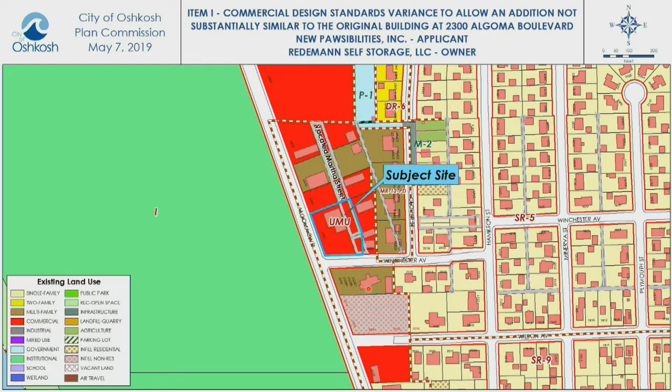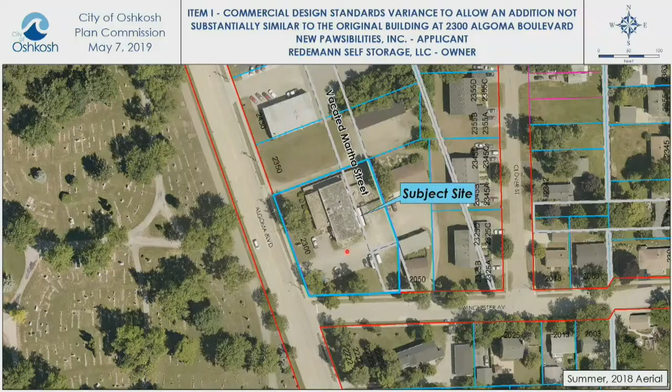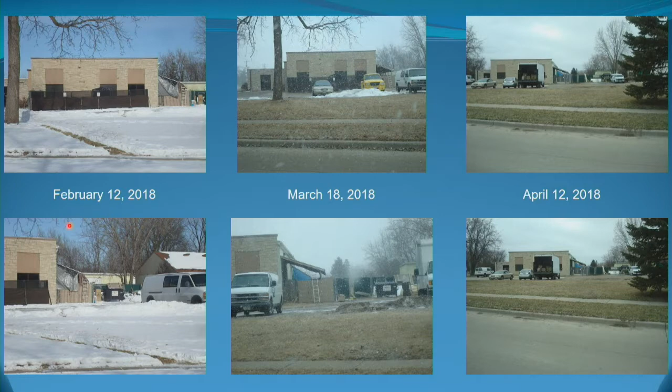Here are some images of the building in question. Planning services staff sent a correction notice early last year for this addition back here, and there was a fence also part of that notice. But the addition in question, or this overhang structure, was put on and no permits were obtained. There was no permit on file in our records, so staff sent a correction notice.

There was a little bit of back and forth between staff and the applicant about this, and it took some time—a lot of time passed—and then finally they applied for a design standards variance for this overhead or awning structure here. So that's what we're looking at.

You can see it's reasonably far away from Winchester, which is the closest street—probably 130, 140 feet away. It is partially screened by this, I think, 6-foot high chain link fence with vinyl slats. So it does help screen it a little bit, but it is there and reasonably prominent.

The applicant stated that a primary purpose for this awning is because they are a dog daycare, to allow the dogs to go outside and have some shelter during winter months or inclement weather—rain, snow events. They can go outside for a little bit, and this helps shelter them. That is primarily why they wanted to put this on and why they're asking to maintain it.

The code reference, because we like to make sure that people are aware of why we're here. This reference basically that we have to account for in the standards is that all additions to an existing building essentially shall match or be substantially similar to the design and materials of the existing building.

The existing building is a brick building. I don't know if I had a really good image of it, but you can kind of get a sense of some of the brick cladding there. There's some glazing. I don't have unfortunately the best image from Algoma, but it's reasonably attractive. It's not a poor looking building for what it is. Former industrial, now commercial building on that site. I think it was built back in the 20s, according to the assessor webpage. So a little while back.

But then they added this on, and because we as staff felt that it was not materially similar, substantially similar in appearance, we wanted them to come for a design standards variance.

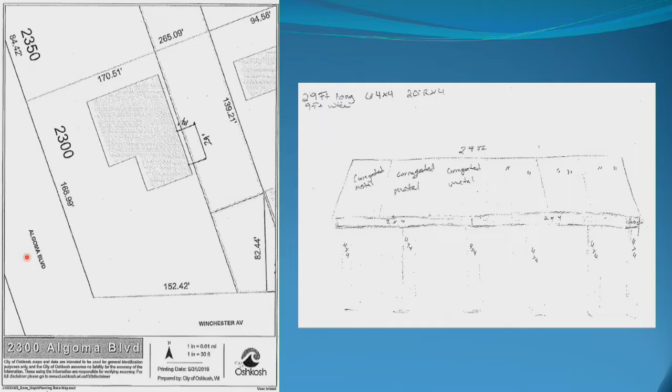So we talked about it as staff. We looked at it. We discussed it with the property owner, with the applicant. So we had some conversation with both of them. And we would recommend approval of the design standards variance to allow this overhang structure.

But we did have a number of conditions for this. We did talk to the Department of Public Works, and because that structure extends into the vacated right-of-way, they would need to have an encroachment agreement on file between the property owner and the city because that structure extends. So a condition of approval would be that this encroachment agreement shall be obtained by the property owner. I did check with the property owner because the applicant and the owner are different. The owner did confirm via email that he had no problem with obtaining that agreement and working with us.

The second condition is that within 6 months of variance approval, an appropriate landscaping plan shall be submitted to the Department of Community Development for our review. And what we're looking at for that is this area, trying to screen this fence a little bit with some kind of landscaping. They did say in their application that they were open to doing some kind of landscaping, so we wanted to see something there. The fence helps screen this structure, but we'd like to see some landscaping, something to break that up. And it's not the most attractive right now, so we did want something in terms of that submitted.

And then the third is that within 6 months of variance approval, acceptable labeled elevations or detail drawings showing a finished condition. Because right now, like I mentioned, the fascia is 2x4 wood, and it's not finished, it's not sheathed by anything, it's not covered. We want to see them either sheath it in some kind of water-resistant material, something, because we feel that otherwise you get issues with rain and water infiltration. That wood there may have issues with that. So we want some kind of finished condition submitted, something reasonably attractive. Our primary concern is maintenance of that long term.

And then also submitting building plans to the inspections division within 6 months, because inspections did ask for a little bit more detailed plans than what was submitted, just showing how this thing goes together and how it looks, in terms of details and how it stands.

And then the last condition would be that the petitioner or owner shall stain or paint the exterior wood supports. Again, we just want to see that finished, and then ensure that the structure as a whole is maintained.

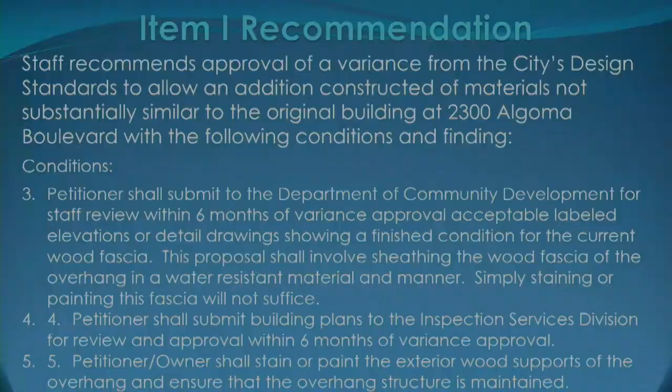And then, actually forgot this one, sorry about that. The last condition is pretty standard, one that we've been putting on, that any additional work involving the exterior of the property and deviating from the base standards of the zoning ordinance shall be filed as separate requests and come through here in the future. We found that the variance, in our opinion, would not be contrary to the public interest.

Okay, thank you. I forgot to ask if there were any site inspections, and I will say that I had a couple of site inspections. And then I am going to accept the staff report as part of the record. I should have done that first. Now, technical questions to the staff, and no opinions in this, just technical questions.

Anybody have? John? I just wanted to know if we could pull it up on Google Street View, just so we could actually see what it looks like now. Yeah, we can do that, because there's no actual pictures.

North. Yep. Keep going. There it is. Yeah, there's the side view of that overhang there. Wasn't really seeing the wood from the other drawings and stuff, so I just kind of wanted to put in perspective what we're asking here.

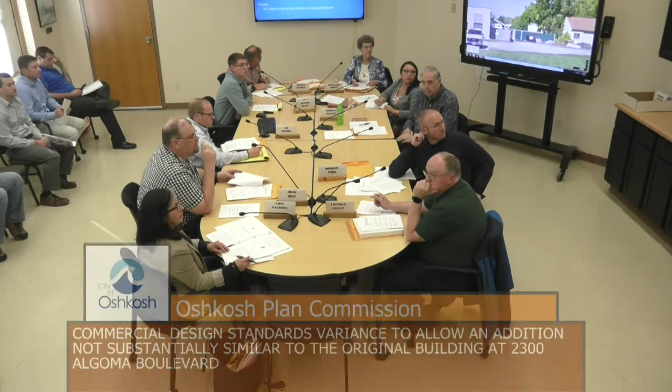Good afternoon, I'm Carmen Scott, and I'm an employee over at New Possibilities, and I met with Jim Deering, the owner, this morning. We went over the conditions. We already have volunteer crew, and we already think that we've got some fundraising in place to do everything that is needed, so we're all set to go.

All right. Any questions? I have a question about the outdoor storage of, looks like dog crates, right next to the fence. That was temporary - the dogs are transported from Kentucky every 2 weeks, so they just came in. So when you're looking at that, they're not permanent there. They move them when the dogs come in, and then they remove them into our garage. Oh, okay, so maybe by tomorrow, the crates will be in the garage. I hope so. I do know that on this Saturday, we've got a work crew coming in to take everything out of that garage and storage and do thorough cleaning. So they could be out there now for that reason as well. But they typically don't live there. Okay, I'm just bringing that up because I think outdoor storage is not appropriate.

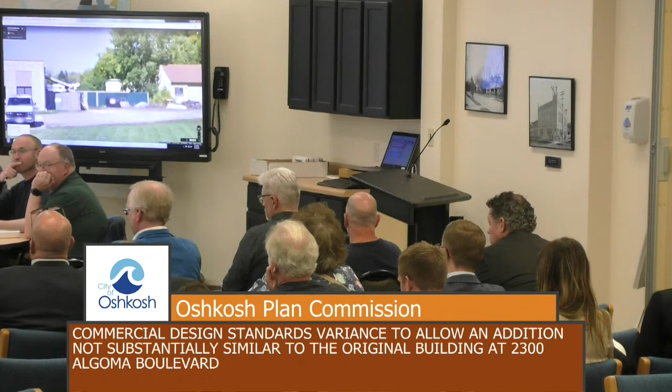Yeah, and I would just flag that. But anyway, any other questions for the applicant? None, right? Okay, thank you very much. Anybody else from the audience that wants to speak on this item? Anyone else? Okay, seeing none, back to the commission.

She's just given her closing statement, so I guess there's no other statement. I would ask for a commission action, a motion to adopt the findings and recommendation as stated in the staff report. I'll make that motion. Second. There's a motion and a second. All right, now discussion.

Anybody? Well, I have a comment. This overhang is ugly, but there are similar colors on it to the building, so I can go with the staff finding if the staff is okay. And I already talked about the outdoor storage, so.

Nothing else? Call the roll, please. Bowen, aye. Ford, aye. Hintz, aye. Palmeri, aye. Perry, aye. Weigart, aye. Crop, aye. Motion carried 7-0.

Okay. Next item is a public hearing. A zone change from institutional district to institutional district with planned development overlay, and approval of a general development plan and specific implementation plan for building additions at 913 Nebraska Street.

And before we start, were there any site inspections? I did one. Okay, at least 3 people. And I will accept the staff report as part of the record. Now, staff, go ahead. This is a request for a rezone to include a planned development overlay for the property. They're also requesting a general development plan and specific implementation plan for building additions on the site.

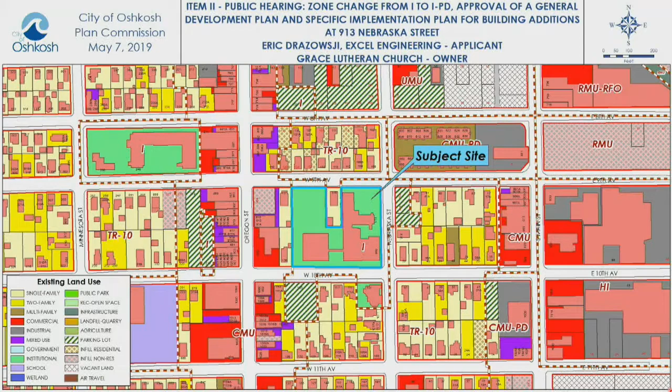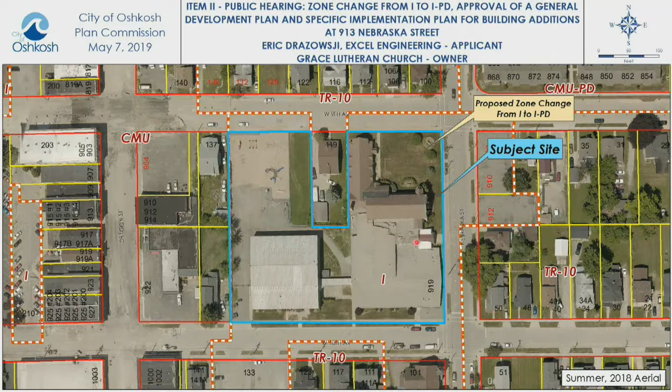So here's the subject site. It has frontage on West 9th Avenue, Nebraska Street, and West 10th Avenue. It's used by Grace Lutheran Church. The surrounding area is primarily residential uses along with commercial uses along Oregon Street. So here's an aerial view of the subject property. It includes a church on the north side, a school on the south side, and then on the west side a gymnasium.

Here's the site plan. The applicant is proposing a 2-story school infill addition between the school and the gymnasium, filling that area in. They need that area to expand for classrooms along with daycare uses. The proposal also includes new entrance canopies on both the east and south sides of the building.

For base standard modifications, they're requesting the plan development overlay, and staff supports approval of the zone change to include the PD overlay, as that will provide opportunity to accommodate additional needs for the site, as well as accommodate the needs related to the unique layout of the property.

For the additions going into the front setbacks, they are proposing a mixture of shrubs along both those additions, which will help mitigate the impact of those setback reductions. Additionally, the canopies and columns should serve to enhance the appearance of those entrances, which you'll be seeing in the elevations towards the end.

For building facades, as this expansion is not exceeding 50% of the existing floor area, the code requires the addition be substantially similar to the design and materials of the existing building. So the addition between the school and gymnasium will be clad in a Cream City brick veneer, consistent with the Cream City brick veneer of the existing school. The new entrances will be identified by changing the massing and brick color and include a heavy timber canopy with a pitched roof. The eastern facade along Nebraska Street will be altered by removing existing vinyl siding at the windows, adding new windows, and creating a brick veneer.

The applicant feels that these changes will enhance the appearance of the facades. So here will be the view from the south side, showing where the addition is between the gymnasium and the school along with the entrance. And then here's the east side with the new entrance canopy.

And with that, staff recommends approval of the rezone, GDP, and SIP with the findings listed in your staff report and the proposed following conditions.

A base standard modification to reduce the front yard east setback from the established building setback to 2.3 feet for an entrance canopy addition. A base standard modification to reduce the street front yard on the south side from the existing building setback to 1.32 feet for the building addition and entrance canopy. A base standard modification to allow 63.9% impervious surfaces, where code allows a maximum of 60%.

A base standard modification to reduce the side yard setback on the west side from 7.5 feet to 1.26 feet for the dumpster enclosure access drive. A base standard modification to allow exterior lighting levels to exceed the maximum of 0.5 foot candles at the right-of-way line, with the final lighting plans to be approved by community development, and that the final stormwater management plans be approved by Public Works as part of the formal site plan review process.

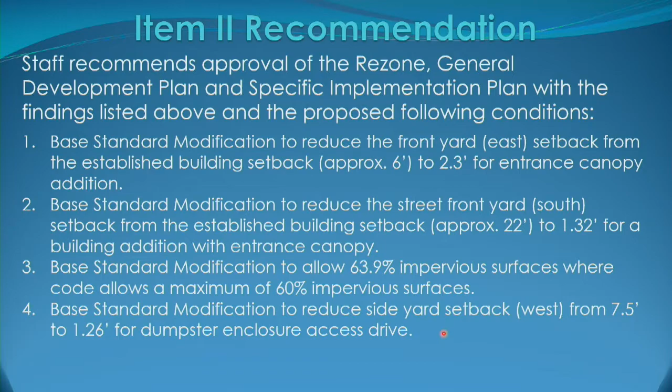Technical questions? Lori?

Yes, I noticed in the rezoning narrative that the school offered, it refers to existing traffic and off-site parking conditions remaining the same as currently exists. My only question is, is this an increase in the number of students? And if so, would that not increase traffic in the area at certain times of day and for after-school events or others?

Can we hold that question for the applicant? Okay. Any other technical questions?

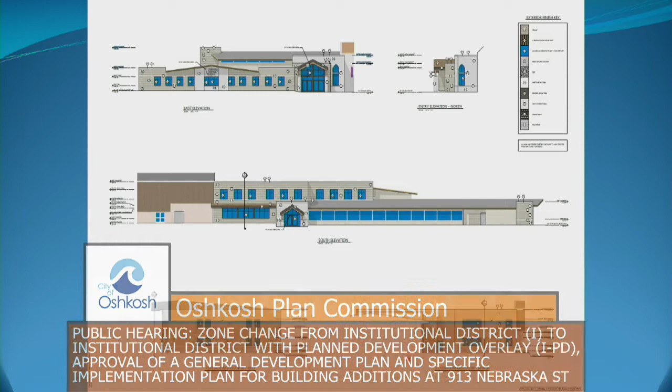Ed? Looking at the classroom elevations, the east side and north side, I know those are kind of hidden from view for the most part, obviously, because they're kind of in the U shape of everything else, those two at the bottom. My point being, I guess, that the windows look a little small. Now, I don't know if that's a matter of personal preference, or me thinking back to being in school wishing there were more windows in my classroom, or maybe they didn't need to be as many windows and I would be more focused.

But I don't know, where do we sit on the code in terms of, I know glass and brick are class 1 materials. I would assume they're meeting their materials thresholds here. I'm just wondering if there's anything that requires a certain amount of window opening.

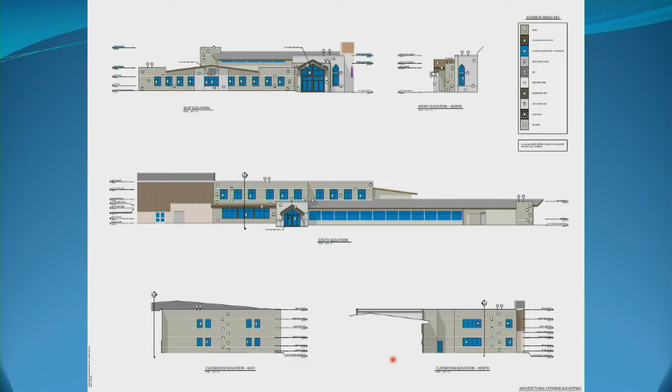Our institutional land uses do not have design review standards, but through the plan development, we can address those things. And I guess it's not necessarily my job to legislate their experience in learning for their students or whatever.

Those just strike me as really small windows for relatively large expanses of buildings. So I guess my question was whether or not it met any part of our code, but it sounds like we don't have any.

Yeah, might have been a miss when we redid the code. We didn't put standards in for institutional. Well, I don't know if it's a miss. I think we just assumed there would be some guiding principles overall on those, so.

There can be. Any other technical questions? If not, then I will open the public hearing.

And first, I will ask for a statement from the applicant if they're willing to do so right now. Is the applicant here?

Hi there, my name is Ben Leibel. I serve as the principal at Grace Lutheran School. So in response to your question, we will see an increase in enrollment for next school year. That would be with or without this building project. We do have a parking lot across Nebraska Street that our families utilize, and we also have street parking on West 10th as well.

We're kind of limited as far as space to increase the size of our parking lot. There is a parking lot across on 10th from the gymnasium that is city-owned, and when it's off hours, we do tell our families to park there. But otherwise, we're kind of limited as far as where we can go. There would be an increase in enrollment and usage as far as families coming and going.

In November of 2000, the Oshkosh Common Council approved a conditional use permit and plan development for Culver's Restaurant on the north side of Westowne. That was part of the condition with the original plan development, that as individual developments came forward, Plan Commission would review and then council would grant approval for these individual projects.

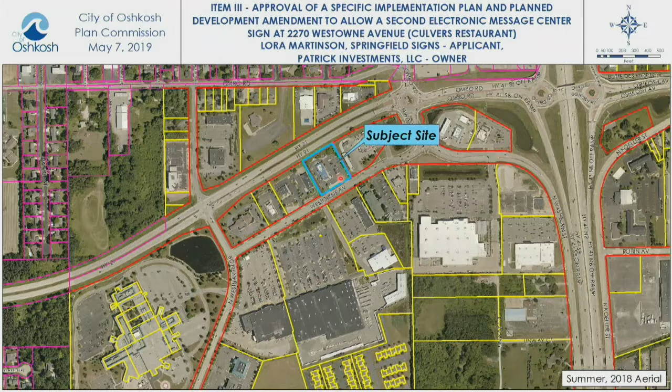The base plan met all zoning requirements and did not receive any base standard modifications or variance from the base zoning requirements. Signage was not addressed at all in the plan development, so that generally means any signage on the site would have to meet base code requirements.

This is a close-up aerial of the site from last summer.

The subject site consists of one parcel, approximately 1.86 acres in size, and is more or less fully developed. The site contains a 4,500 square foot restaurant, associated parking, trash enclosures, stormwater management facility, and site landscaping, and 3 ground signs: an identification sign facing Westowne, another identification sign along State Highway 41, and a communal sign for Menards, Festival Foods, and Goodwill along State Highway 41.

We can talk about the existing signs a little bit. First, I'm going to touch on the existing communal sign located on the north side of the property. This is technically an off-premise sign, which is generally prohibited per the zoning ordinance.

In June of 2000, Common Council approved a base standard modification to allow an off-premise sign in hopes that it would limit the amount of clutter and other signage along Westowne Avenue. So the council approved the location of this off-premise sign to serve Menards, Festival Foods, and Goodwill.

applicant proposed to replace the changeable copy cabinets with approximately 25 square foot electronic message center signs, or EMC cabinets. At that time, the applicant was notified by staff that the zoning code only allows one EMC per property, and the way to get a variance from that would be having a plan development amendment to get a base standard modification to allow a second EMC on the property.

At that time, the applicant decided to move forward with the Westowne Avenue EMC down over here, and then seek approval for a second EMC along State Highway 21.

In the application, the petitioner or applicant states in the narrative that Culver's is currently wanting to modernize their signage from the labor-intensive, potentially hazardous daily changes of the manual reader signs. I'm sure you're familiar with Culver's. Every day they have a flavor of the day, which is updated on a daily basis.

They're stating that with the change to an EMC, the flavor of the day could be updated via mobile device instead of manually changing out the text each day. The applicant also lists other advantages of EMCs, such as use of graphics to promote products, potentially reaching out to a broader range of consumers, and providing wayfinding and increased safety.

The applicant also states that the EMC sign along Highway 21 would only be changed out once per day and would be a static sign, just displaying the flavor of the day. So the sign along State Highway 21 would essentially be serving the same function as the existing manual copy sign that's currently there.

With this being a variance type request, generally a hardship should be demonstrated as to what is unique or unusual with the property, warranting the need for a second EMC. The owner has been approved for the single EMC sign, which is allowed by right, and will have the ability to utilize those additional electronic features of that EMC.

In staff's view, the applicant does not make a strong case for any hardships other than the inconvenience of manually changing the reader board each day.

As a comparison, had this type of request been brought before the Board of Zoning Appeals, it would be viewed that the applicant does not demonstrate a uniqueness to the lot, but rather a personal preference to the owner of the lot, which is basis for denial per state case law.

Staff is also of the opinion that this request conflicts with the spirit of the planned development, which was approved for this corridor. Section 30-158B2 states, 'It is not intended that the city will automatically grant exceptions or base standard modifications in a planned development overlay district, and it is expected that the city will grant only such exceptions when they are consistent and comparable with benefits to the community that result from planned development.'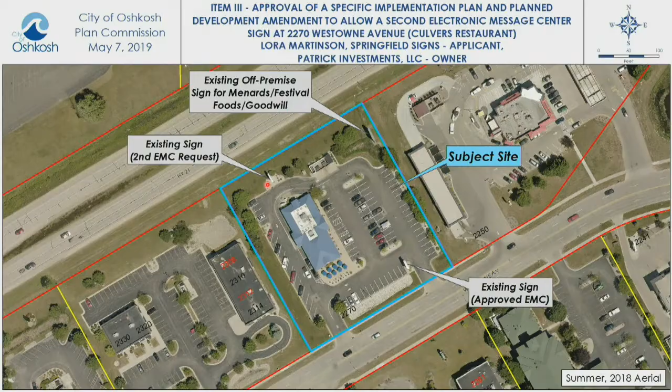Zoom to this. This is an aerial showing the corridors of State Highway 21 and Westowne. Staff feels that if this is approved, it would be setting a precedent, enabling other businesses along these corridors to seek similar requests. The original intent of this Planned Development was to minimize the amount of ground clutter and distractions along Westowne Avenue and State Highway 21.

Staff feels that a series of EMCs along State Highway 21 would add to the number of distractions to drivers, more so towards drivers heading eastbound, towards the North Washburn Street and Omro Road roundabout.

Generally, also when applicants seek relief from basic zone district standards, we usually see additional property enhancements proposed as a means of compromise. In this case, you probably would like to see additional landscaping features or something to offset their request. And per the submission, the applicant has not indicated any other site improvements other than the second EMC.

Staff feels that the base standards for the signage in the suburban mixed-use district is adequate for other businesses to function and attract the local community and out-of-town visitors to the location. If you've driven down State Highway 21 or Westowne, staff feels corporate imagery is well represented along both these streets, and the public should have a general idea of what goods and services these corridors provide.

Staff believes that the proposed Planned Development amendment fails to meet the standards set forth in the zoning ordinance, and does recommend denial for the amendment proposing a base standard modification to permit a second electronic message center, as it is in conflict with the following criteria.

First, the proposed development project is consistent with the overall purpose and intent of this chapter. Staff feels it's conflicting: the proposed Planned Development project would maintain a desired relationship between land uses, land use densities and intensities, and land use impacts in the environs of the subject site. Third, the proposed architectural character of the project is compatible with adjacent and nearby development. And lastly, the project will positively contribute to, and not detract from, the physical appearance and functional arrangement of the development in the area.

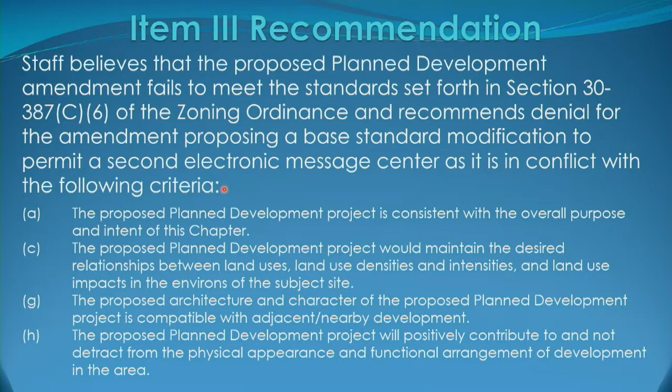Okay, thank you. Technical questions for the staff? The site has the two current pole signs on it - is that permitted because it has frontage on both of those right-of-ways, correct? Correct, you're allowed one ground sign per right-of-way frontage.

So in theory, I don't think the other properties along here - maybe Community First, I can't remember - have the double signs the way Culver's does, unless maybe Community First has one on the Westowne side. This here is another communal sign for Menards. Yeah, I know that one is a group sign, right here.

We'll pull it up on Street View here, or Google Earth. You're doing great work today, Mark. Amazing, just great work - we have to give you a reason for having the TV in here. As long as he's not trying to hand manipulate it.

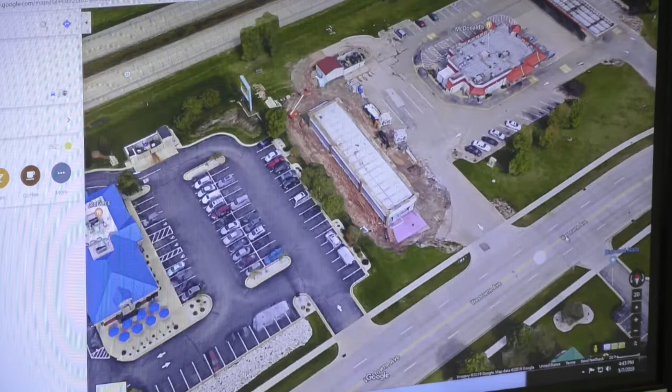I know they've got theirs on the corner - McDonald's is on the corner, you're right. McDonald's has one on the corner. I don't think they have theirs on... and if we proceed down, we have the combined sign, Culver's sign. I feel like we're going the wrong way. Getting there - that building does not look like it has... one on this multi-tenant building does have frontage. Wendy's does, and then Community First does not. So on Westowne, though - I guess that was more my question. Overshot. Yeah, so Community First has one right on the corner. They've got the one that's... Wendy's has a small monument sign right there. And then I don't think this building has a freestanding sign on Westowne at all. I don't think Papa Murphy's does either - look on the south side of Westowne. Okay, yeah.

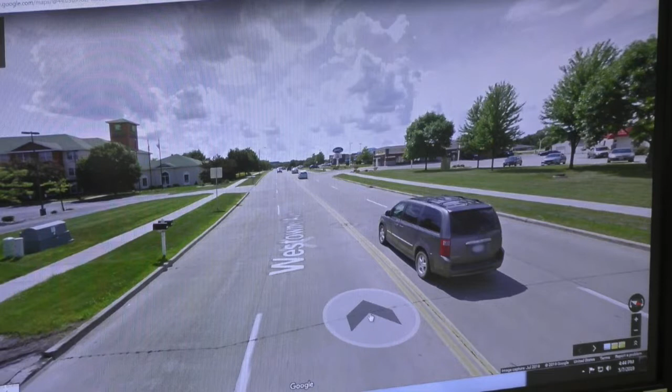I'm just trying to understand, when this was approved, it was approved per the sign ordinance at the time. You note in there that it didn't receive any base code modifications when it was approved in 2000. So those signs, as they sit, were permitted per code with no base standard modifications under that sign code in 2000. Correct.

Gotcha, and just to make sure I know - it does look like those EMCs are a reduction from the manual signs. It looks like in your report, the first manual sign is 69 square feet, the second is 64. And is it correct that the two EMC cabinets would be 25 square feet? Approximately, just shy of 25 square feet each.

John, yeah, I have a few questions. First off, maybe we're falling behind technologically with the city code. Do we find the changeable letter signs more attractive than EMC signs now?

Because we're so anti-EMC signs, and I understand, I'm just asking because as somebody who's been a general manager at a fast food restaurant, it's a lot of time, and kids aren't always paying attention. I can understand the injury thing because they're messing with this, putting letters in, stuff falls down, if it's wintertime there's ice and so on. I get that part of it.

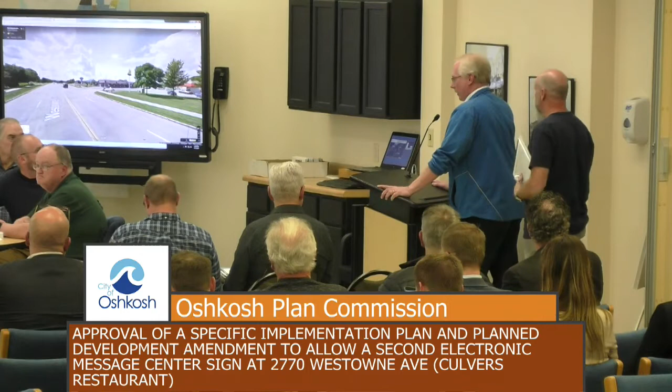My name is Dan Lichtenwald, and I am the owner of that Culver's location. I don't know what else I can add - I think it's all been discussed by this body. The only thing I'd like to add is, as was mentioned before, that site is a little unique to the area given that there are two existing signs. We want to take advantage of current technology and upgrade that property, getting away from the changeable copy board to something a little more eye-appealing, a little more up-to-date. And we will be very sensitive to not having the Highway 21 sign be anything other than a static board.

So we're not really changing or adding signage. Again, we're just trying to upgrade that property. And I guess for this body, if we're not allowed to have that other board, I'll most likely take that changeable copy piece down off Highway 21, again just for the safety of my staff.

5 o'clock in the morning when it's 40 below zero and people are changing that sign, we want to get away from that. So I understand that Culver's is a little bit unique. I don't want to apologize for that, but we are a little unique to that neighborhood. Whether or not we put a digital board up, I don't know if that's going to push the neighbors to do the exact same thing. I mean, those pieces of equipment are not cheap. So that's really all I have to say, unless somebody has a question for me.

This area is part of the Pearl Jackson Marion redevelopment area. So we have three separate parcels. Parcel J is at the southwest corner of Marion and Jackson. Parcel I is on the north side of Marion Road, and parcel H is at the southwest corner of Pearl and Jackson.

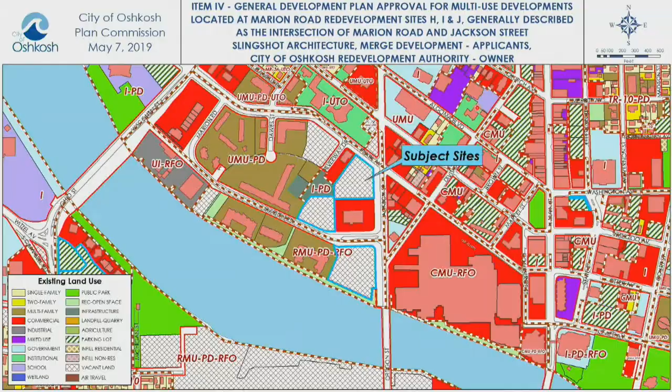So we have a mixture of zoning for these subject sites. The southern parcel J is in our riverfront mixed-use district with a plan development overlay and a riverfront overlay. The other two parcels are urban mixed-use district with a plan development overlay.

The city's comprehensive 2040 land use plan does recommend this area as part of the center city. This is part of the Marion Road Pearl Avenue redevelopment project area, originally created as part of TID 13 in 1998. These parcels were originally a mixture of industrial and commercial type development, and the city for the last 20 plus years has been working on the redevelopment of this area.

We do have some historic photos to show you, just to look at the area. This is 1937, what the area looked like.

2009, so this is after a lot of the redevelopment had begun. A lot of the work done as part of the original TID district began purchasing properties and clearing them for redevelopment.

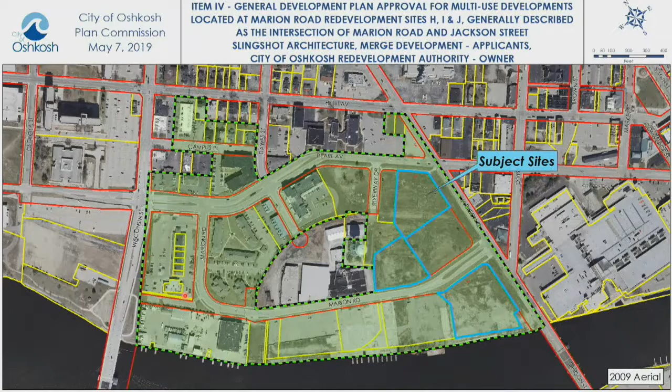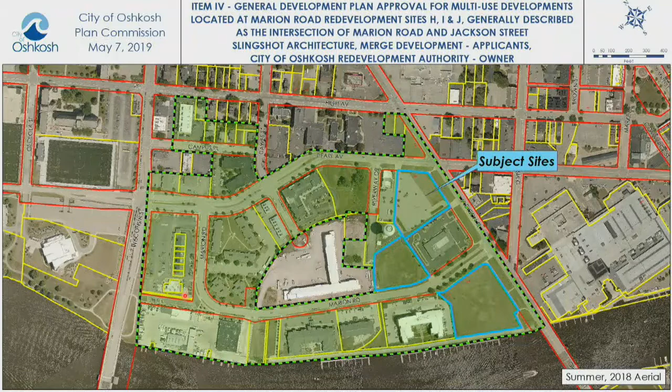And then here's as we sit in 2018. As you can see, the majority of the area has now been redeveloped, with a couple of parcels still outstanding, three of which are what we're discussing today.

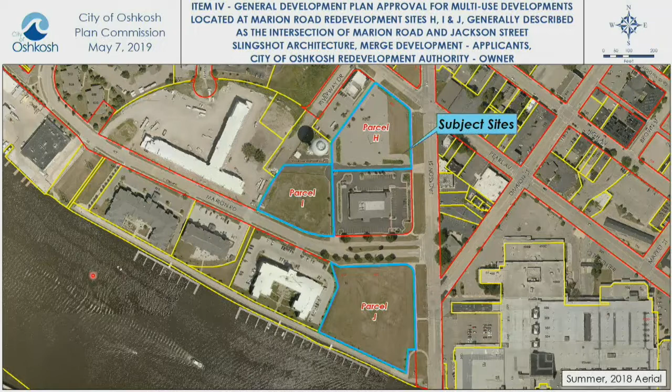So to look at it a little bit, parcel J is currently a vacant site, and I is a vacant site. Parcel H, which had a number of contaminants found on the property years ago, was a parking lot capped over it, as well as a pre-established building pad. So this development on that parcel will utilize that existing parking lot along with that building pad.

So the applicant has identified a number of base standard modifications that it would take to get this project moving forward. So we are beginning with just that general development plan phase. The applicant would then come back with SIPs for each one of these sites individually as they move through their phase development plan. So beginning with Site J.

Site J is what we'll call the primary focus of the redevelopment project. It includes three buildings. The first is Building 1, along the east side of the property. It's a 5-story mixed-use building of approximately 110,000 square feet. It will include 111 upper floor residential units with commercial office space on the floors below.

Something unique to this building is it kind of looks like two. It's actually a single building that has a pedestrian walk at grade to go underneath it, and the actual building spans above it on the 2nd through 5th floors.

Building 2 is approximately another 85,000 square feet of mixed-use building, located here. It includes a mixture of 9 residential walk-up ground floor units, 29 upper floor residential units, and commercial space on the first floor. Finally, Building 3 is row home residential type development of approximately 8 units.

The site also consists of about 62 on-site parking spaces and a single access point, located at the northwest corner of the property. This access drive is defined where it is because we do have a median in Marion Road, and it is lining up with where that median would end. The site is about 78% impervious, which falls below the 80% maximum impervious for our riverfront mixed-use district.

Site H, located at the southwest corner of Pearl and Jackson, is proposed to be approximately 21,600 square foot, 2-story mixed-use building. Again, it would have commercial office space on the first floor, residential units above it. The concept plan indicates approximately 14 residential units on the upper floor. It also includes 128 on-site parking spaces.

Again, it has 2 existing current shared access drives, one located here on Pearl, one located here on Jackson. It's coming in at about 80% impervious surface, which is below the code requirement of 85% for urban mixed use. Site I is 9 townhome type units.

These are 2-story type units that are being shown. It also includes 91 parking spaces and 67% impervious surface, again below the 85% maximum.

One thing to call out quickly is parking. The applicant is choosing to develop all 3 sites as a shared parking strategy, since the main focus of the largest scale development will be on Site H, which cannot accommodate all of its parking needs under current code requirements. So they're using Sites I and J to offset some of that parking ask.

These properties are zoned riverfront mixed use and urban mixed use, which both have full parking requirements. If you jump across the street to our central mixed use district, which this development is really in keeping with what our downtown wants, central mixed use does not require parking for anything outside of residential units. So they're exempt from commercial office parking requirements.

So again, I do just want to reiterate one last time that although we're not recommending approval of base standard modifications at this time, we do think the uniqueness of this development really does lean itself to some base standards, but we're going to want to evaluate the exact degree of those requests as final plans come forward. That being said, staff does recommend approval.

Just some more drawings here. This kind of shows the overall parking situation for the development. And then here we do have some of the concept drawings. Again, this is just a GDP, so we don't have final building renderings. The only renderings they have for us so far are of Site J, not of the other two sites.

So this is those walkout residential units. This would be along Jackson. One of the things you can't see in these: the applicant's also considering doing a kayak launch as part of this riverfront area, which I think is unique to this development.

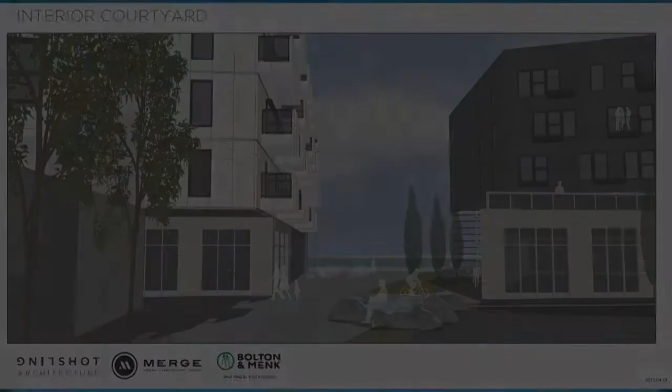So this is looking south through the site towards the river. This would be looking between buildings 1 and 2 from the river north.

So staff is recommending approval with a condition, basically that no base standard modifications shall be granted as part of the GDP approval. Rather, approval, conditional approval, or denial of each base standard modification will be undertaken as part of the SIP for each project as they are brought forward.

Okay. Technical questions. Lori?

Yes, I just want to make sure I understand. So, a couple of places, Site I for example, where we talk about a 2-story building, 9 walk-up residential units — I'm not sure if there was reference to walk-out or walk-up. So are we talking literal walk-up, there's no elevator? Okay, so for Site J, where it's a 5-story building along the river walk, they're talking about walk-out units, where literally you can — they're first floor units.

There's also upper floor units in those buildings, but the first floor units would essentially have direct access out the front to the river. I don't know if they would have stairs or if they're true grade, but the intent is there that there's direct access to the river.

And the upper walk-up residential units on the upper floors, would those be literally walk-up, or would there be elevators? I would defer that to the requirement of the code here, to have an elevator to get a certain height. We'll save the questions for the applicant. Moving on to site H, again just questioning accessibility on site H and I.

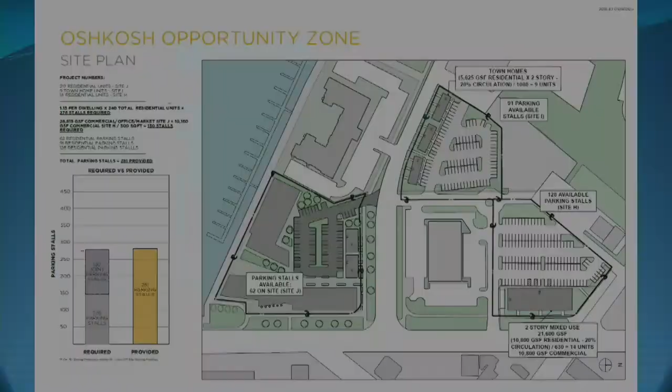Okay, other technical questions? So the property directly to the west, already developed, how many stories is that? That's about a 4, I believe. The Anthem property? Anthem is, I think, 4 stories. I believe that's wood frame.

Is it 4? 1, 2, 3, 4. With that underground half-story like parking, it's like 4.5-ish stories.

We learned earlier that you can put a 5th story on a property adjacent, which is what's being proposed here, a little higher of a building. My question is, across the street, the mall property, if somebody tears that down, can that then be 6 stories?

I think what you're referencing is those CMU standards we had a while back. That standard only applies to adjoining buildings. In terms of the allowed height here, it would be within conformance with what the code allows. So if the property across Jackson is redeveloped, that does not come into play? Would not come into play, they would have to meet the same height standards for the district it's zoned. Just trying to prevent a reversal of the Dr. Strangelove thing.

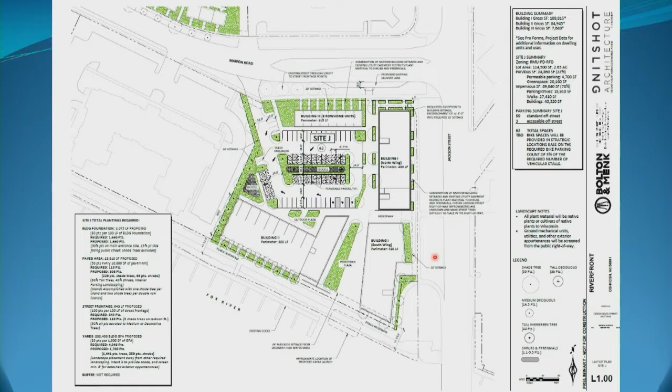Would this, a lot of building here, would this... rephrase this. I think the city recommended, remember the alternative, but it wasn't the high bridge, I don't think. It was that unmovable bridge. No, we went with the most expensive option, the $36 million drawbridge. Would this plan accommodate that decision?

It should, we're going to bring up the expert in the room. Would we be forced into the high bridge alternative? Turn to the right and see the amount of right-of-way that we dedicated as part of this project. You see that swath of terrace, that's not typical, that was set aside in case we had to realign the bridge, correct Justin? Correct, we dedicated the right-of-way not knowing exactly what was going on with the bridge. I believe the development has also been made aware of the potential for bridge realignment or reconstruction, and they will work with whatever direction comes down the pipeline.

But they're going to be wanting to do something probably well before the state's willing to fund a new bridge. Construction on their property, yeah. As far as I know, yes. So I just want to make sure that whatever we've got here, they understand they can work with either a flyover bridge that comes up high or...

Again, they've been made aware of the potential different options out there for the bridge reconstruction or realignment. And as Darren mentioned, we set a large enough right-of-way that we hope to accommodate the various options of the bridge. We can't guarantee it, but we took a large swath of right-of-way there, hoping to meet what may happen.

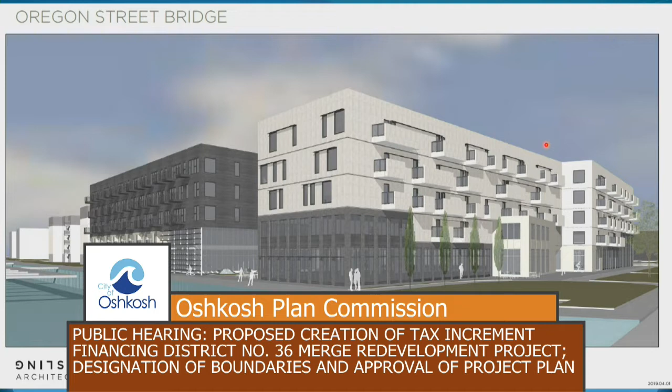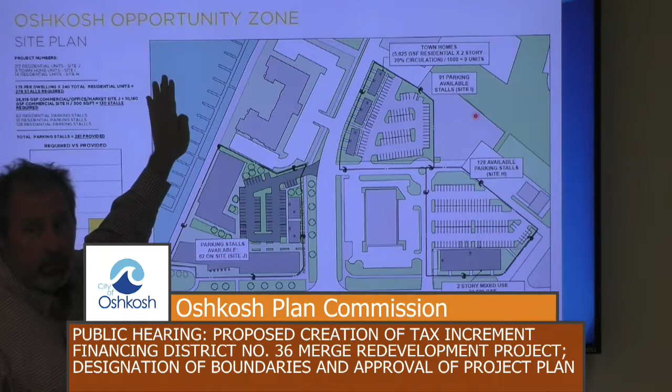Now this one doesn't show it—Mark, go back to the west, you can see. Yeah, just go back to the overhead view. So you still, yeah, you're going to... they're not going to have the view down this way, which is probably partially blocked by City Center at some point. But other than this wall, you still do have good perspective out to the river. So yeah, but there's definitely one side of that development that's going to have some impact.

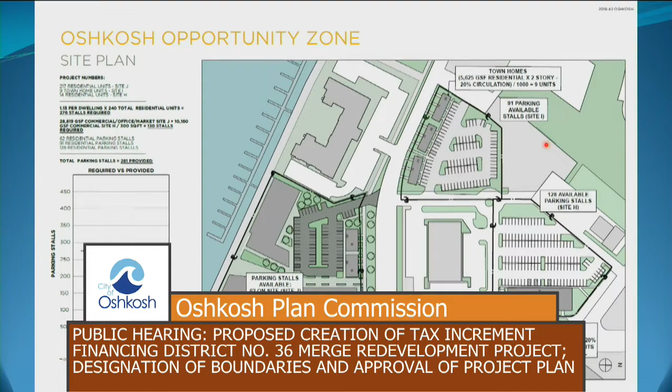Other technical questions? Seeing none, I'll open the public hearing to anyone that wishes to speak on this. Anybody wanting to speak on the public hearing on the TIF district? One more time—public hearing, TIF district. Okay, public hearing is closed.

Commission, we need a motion. Motion to adopt the findings and recommendations as stated in the staff report. Is there a second? Second. All right, motion and a second. Discussion.

I noticed that TIF districts are overlapping. Correct. And somehow that all ends up working out well. Now what happens is, you have a TIF over here, you have a TIF over here. All the new value that's going to this other TIF district goes to TIF number 36, and the other ones are frozen. They maintain their existing value, which is probably not much because it's mostly owned by the redevelopment authority. So all the new value goes to the new district.

Any other questions, comments? All right, ready for the vote? We'll call the roll, please. Ford, aye. Hints, aye. Palmieri, aye. Perry, aye. Weigart, aye. Crop, aye. Motion carried 6-0.